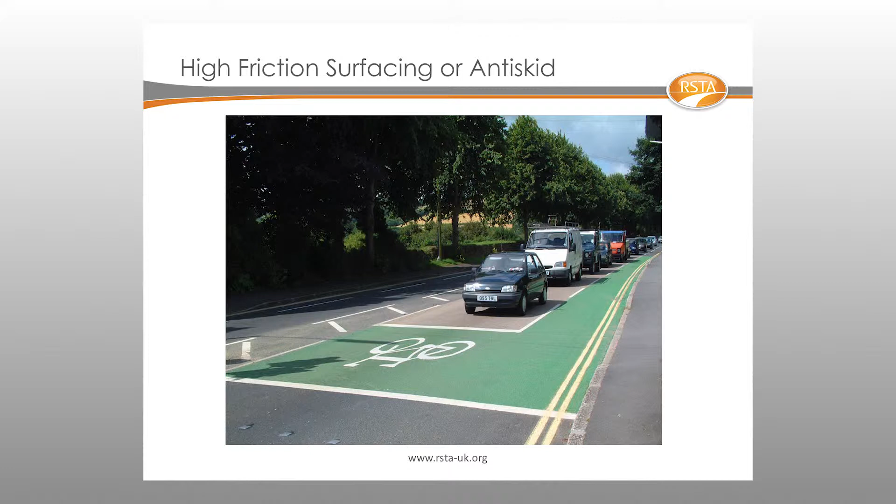So that's what we're talking about. There's different types of high friction systems in use, and the next speaker will go into those in some detail. It was developed primarily to reduce wet skid related accidents. The market grew to about 4 million square metres. Today it's less than 1 million square metres, so it's decreased quite markedly.

And I think the reduction really is tied in with the need for councils to reduce expenditure, reduce their maintenance budgets, and so on. So it's got caught up with all that need to save on costs, and the perception is it doesn't last very long, it's expensive, it's a discretionary spend, and we don't need to use it anymore. And this is really why we use it. If you're into SCRIM and measuring skid resistance, the mark of high friction is 0.5 SCRIM or above.

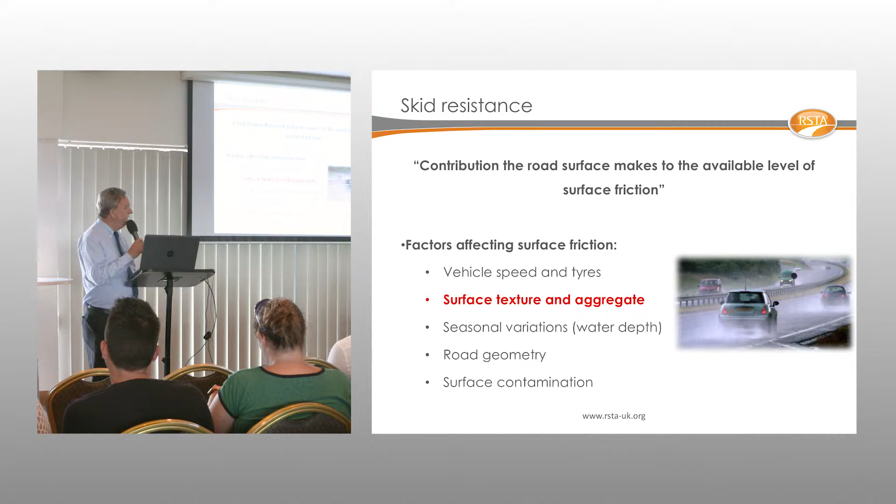Achieving skid resistance under wet conditions is quite complicated. There's a lot of parameters that are affected. You can see some on the screen there. Surface texture and the aggregate type are absolutely critical to achieving good wet skid resistance. And there's two types of texture. There's micro texture on the aggregate, and there's macro texture, which is the texture there.

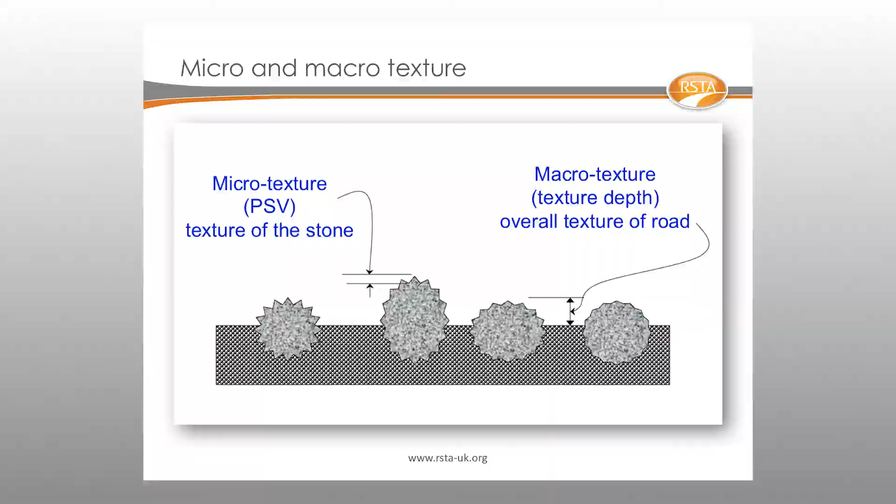The reason that anti-skid is unparalleled is largely down to the aggregate type that's used, calcined bauxite. It doesn't polish. It's got a very high PSV, very high resistance to polishing under traffic. So it retains its micro texture, which is very critical for achieving wet skid resistance, particularly at lower traffic speeds. Macro texture becomes more important as traffic speeds increase.

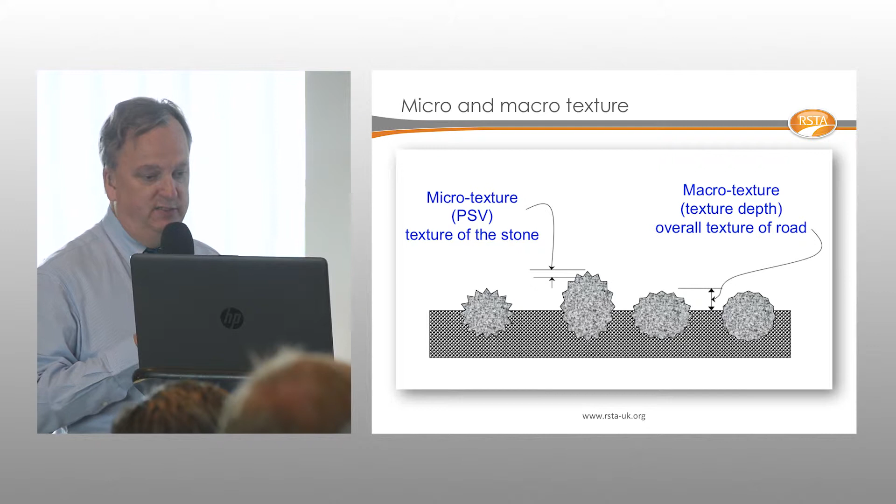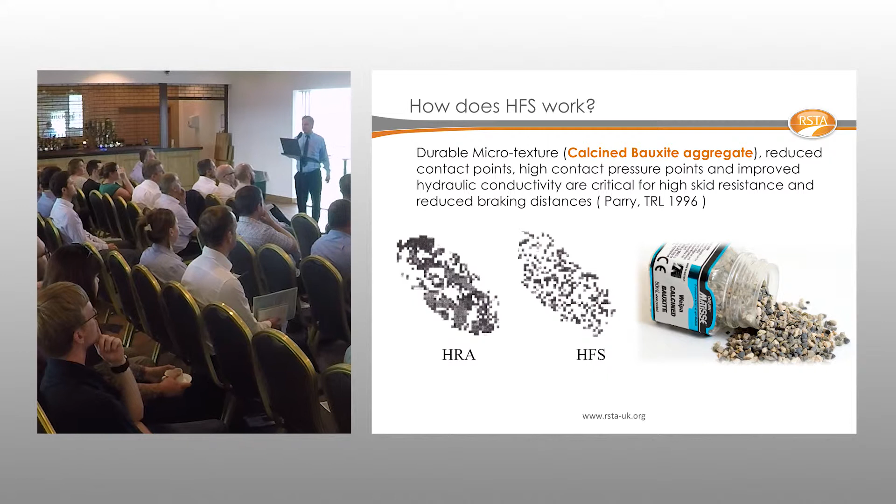We haven't got a presentation today on calcined bauxite, so I'll just say a few words about it. The aggregate comes from bauxite clay. It's quarried in places like China, Guyana and India. It's calcined in a kiln at very high temperatures, and it's an incredibly hard material, very high in alumina content. There's been some research done over the years on its use and its performance.

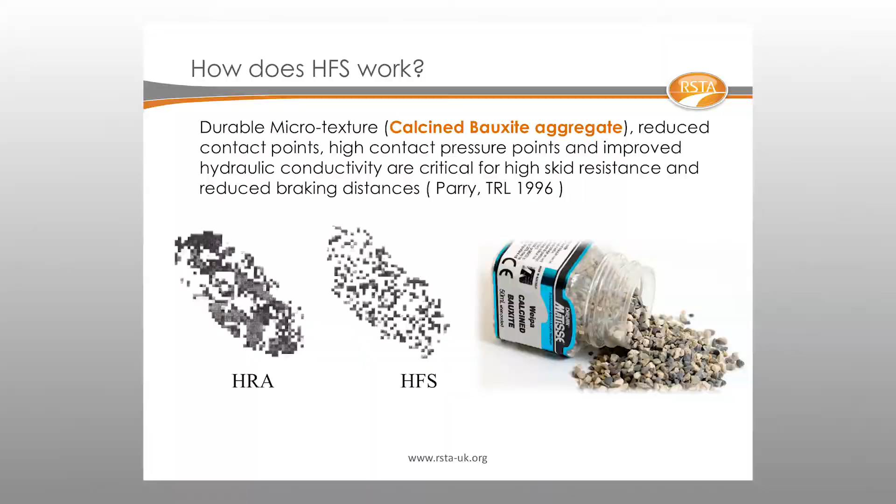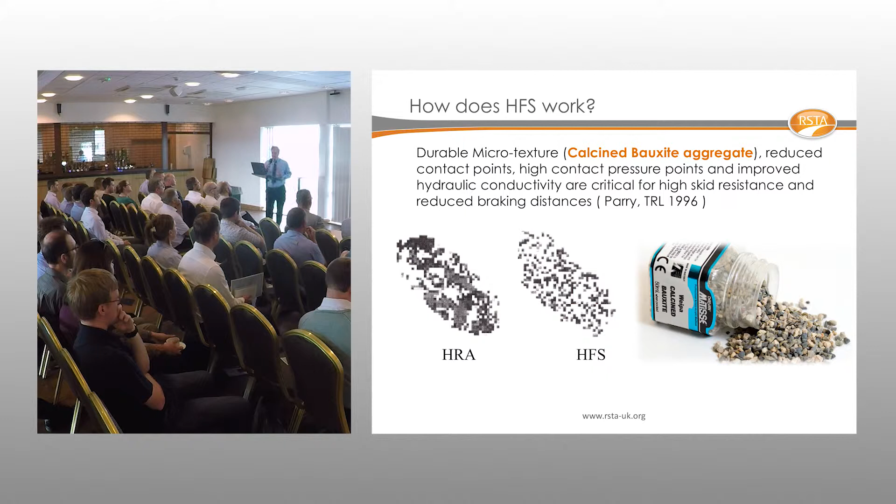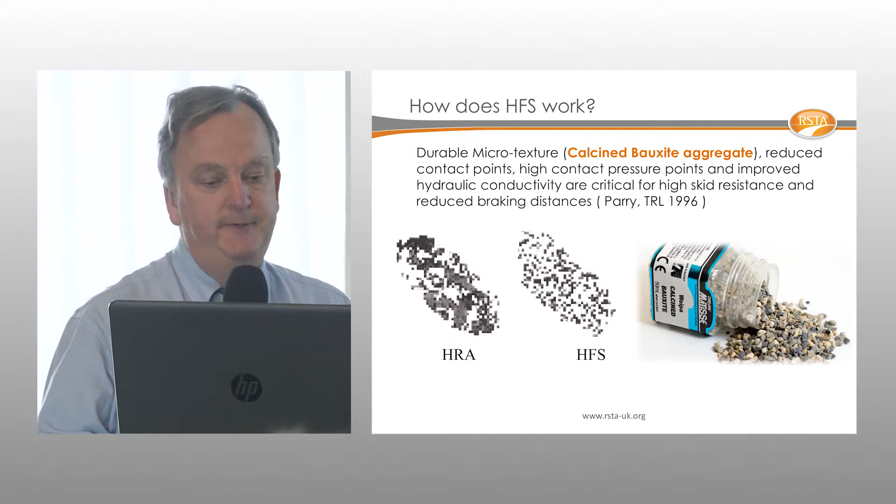You can see on the screen there are two footprints which are meant to replicate the contact between the car tyre and the road surface. You'll notice that the footprint under the car tyre travelling over a high friction surfacing looks quite different to a HRA surface. The HFS surface provides lots of high pressure contact points, like needles really, that provide very high friction. And you'll also notice that there's low density on the high friction footprint, which creates lots of channels to improve the hydraulic conductivity and help to shed the water between the car tyre and the surface.

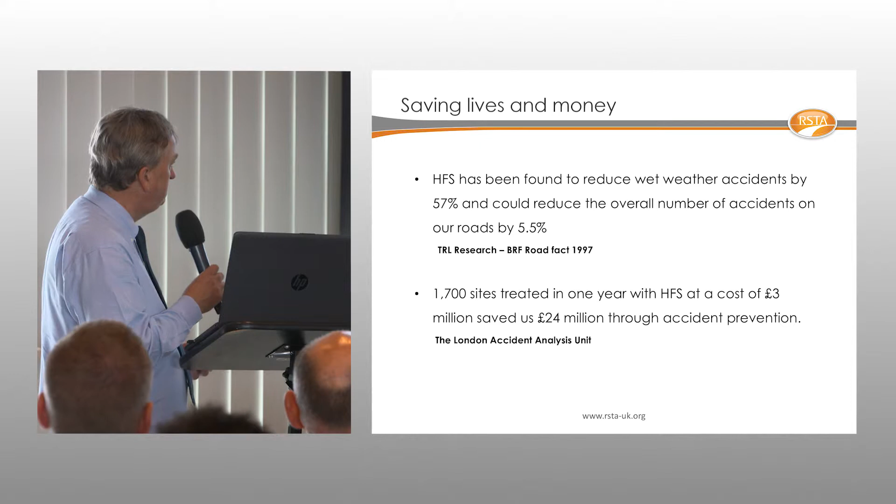We know high friction works. There's been lots of research done on its use over the years, lots of testimonials. We know it saves lives. And sometimes we need to just focus on the value it provides, not just the cost. Some work was done by RSTA a number of years ago. They looked at different schemes, different ways of improving road safety.

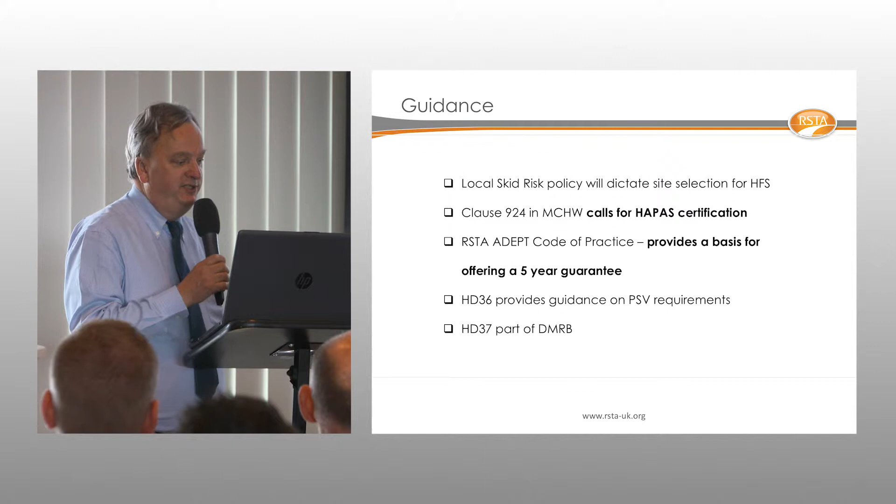And high friction surfacing is embedded in all of the specifications, in the Specification for Highway Works, in the DMRB, the Design Manual for Roads and Bridges. And I'm sure it features, or should feature, in every local authority's asset management plan and skid risk policy. You're no doubt all aware of the new code of practice coming in October, Well-Managed Highway Infrastructure. So it's a mandatory requirement now for authorities to have a skid risk policy, and we'll hear more about that later on this morning.

The specification clause is clause 924. It doesn't say very much. It just says that the system to be used should have HAPAS or equivalent certification or product assessment. There's a code of practice published by RSTA jointly with ADEPT about 5 years ago. It's been recently updated. The code of practice is important because it provides a basis for providing a 5-year guarantee. So we would encourage all authorities to think about stipulating a 5-year guarantee in contracts.

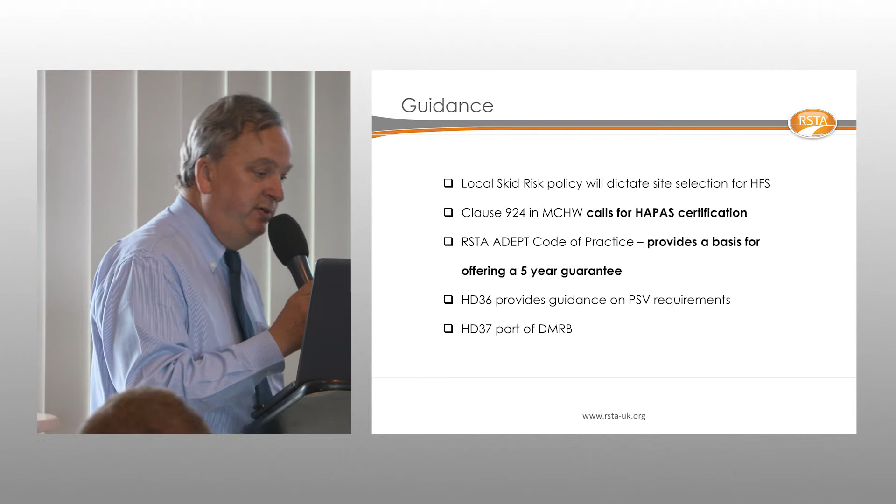HD 36 is important. That provides guidance on how to set your investigation levels and PSV requirements dependent on the site category. And HD 37 is part of the DMRB, which is being updated.

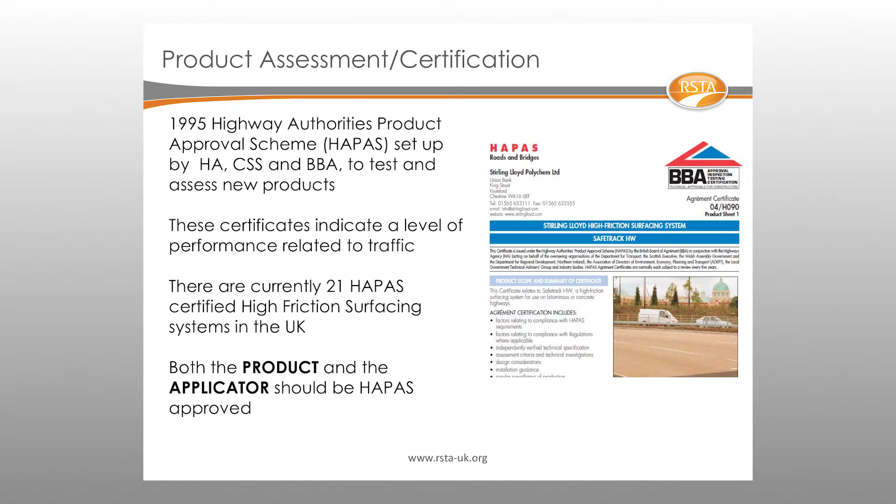There is a presentation later on today about HAPAS and the HAPAS scheme. I think the scheme for high friction surfacing was in fact the very first HAPAS scheme. I think it sprang into life about 1995. Currently there's 21 certificates in issue, which cover a wide variety of different types of high friction systems. And the important thing also is that the scheme covers both the performance of the product, but also the application of the product. So applicators also need to receive HAPAS approval.

The market's changing. The BBA dominated this particular product assessment certification scene for many, many years. We've now got a company called PTS who are providing a similar type of, or an equivalent type of product assessment certification.

So when to use it, I think basically your skid risk policy will outline where you should be using high friction surfacing, anywhere where there's a SCRIM requirement of 0.5 or above, but typically approaches to roundabouts, crossings, junctions, where you've got a bad accident history on the site.

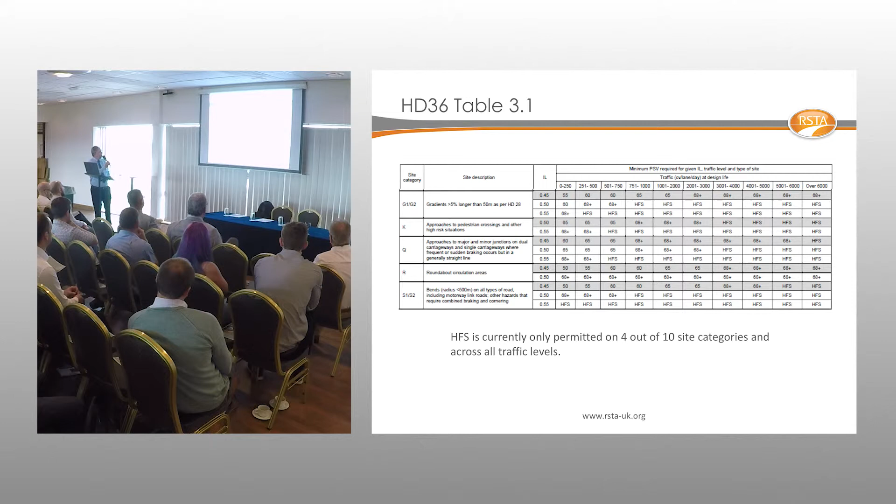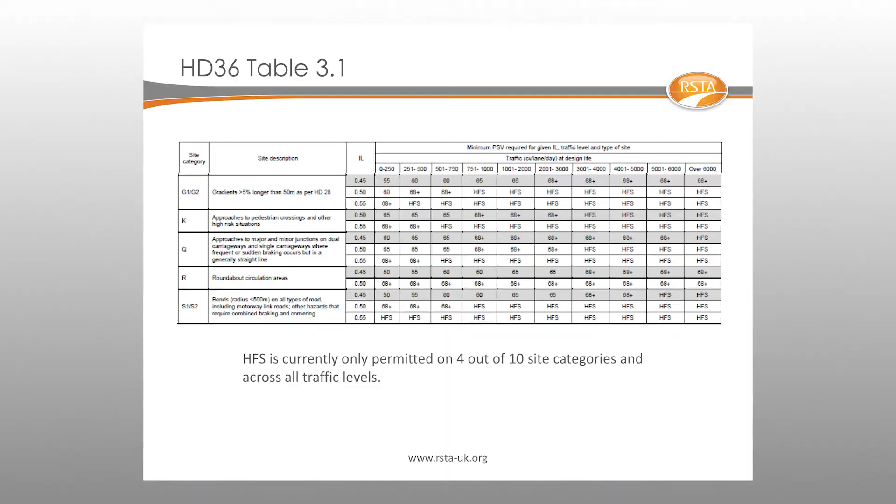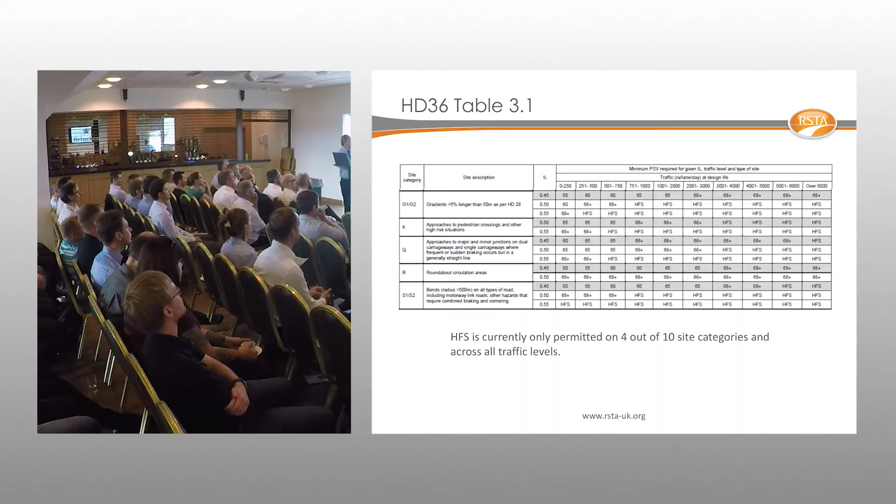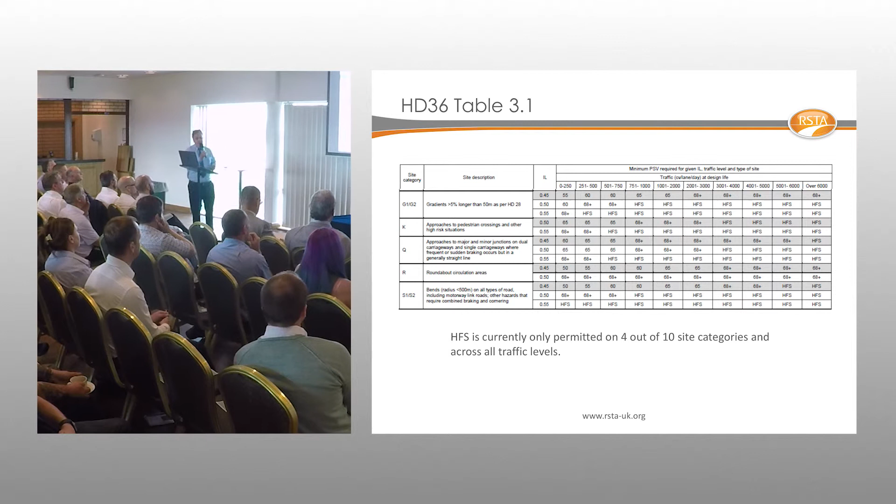I mentioned HD 36. This is table 3.1. HD 36 is now going to be called CD 236 in the new DMRB as part of their revision, but the table remains pretty much the same. The shaded rows is the default value, investigatory level driven value for PSV. And you can see there where high friction surfacing features in the table, depends on the site category. So out of the 10 site categories in HD 36, only 4 currently require high friction surfacing, and it's generally down to risk and traffic levels.

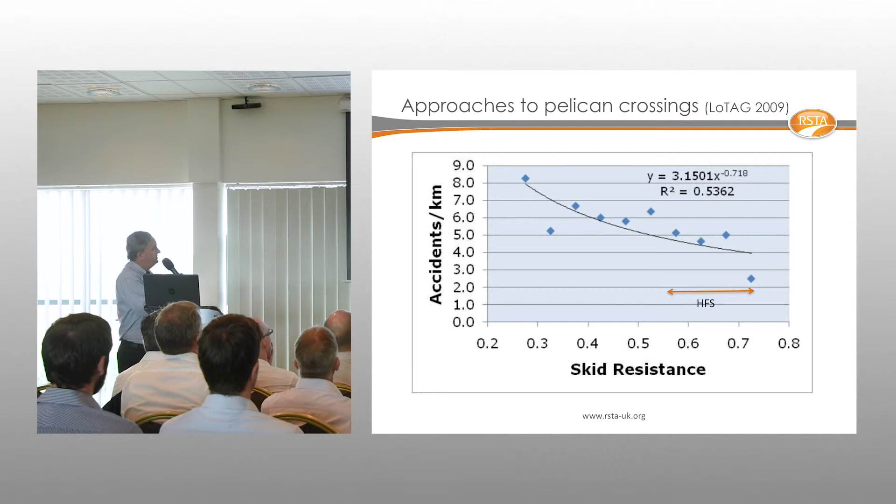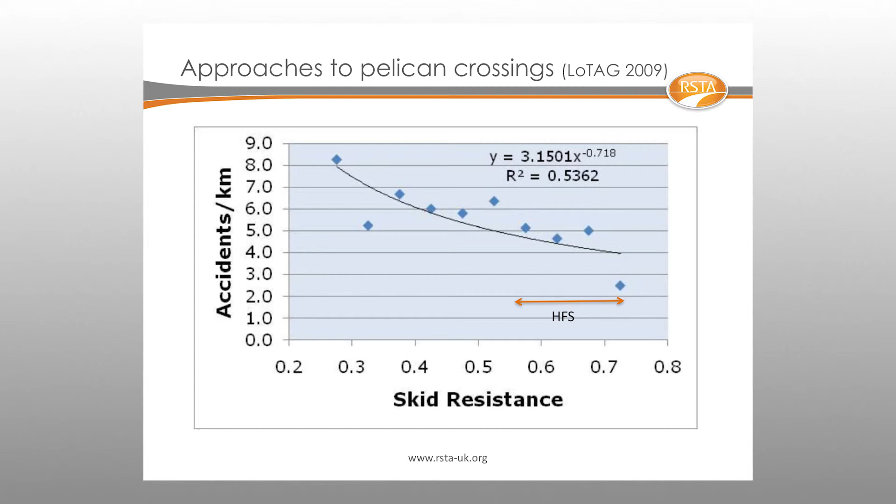Interesting piece of work done by LOTAG, the London Technical Advisors Group, back in 2009. They published this interesting little diagram which clearly shows that accidents per kilometre decrease with increasing skid resistance, perhaps not surprising. You can see there the high friction surfaces above 0.5 SCRIM.

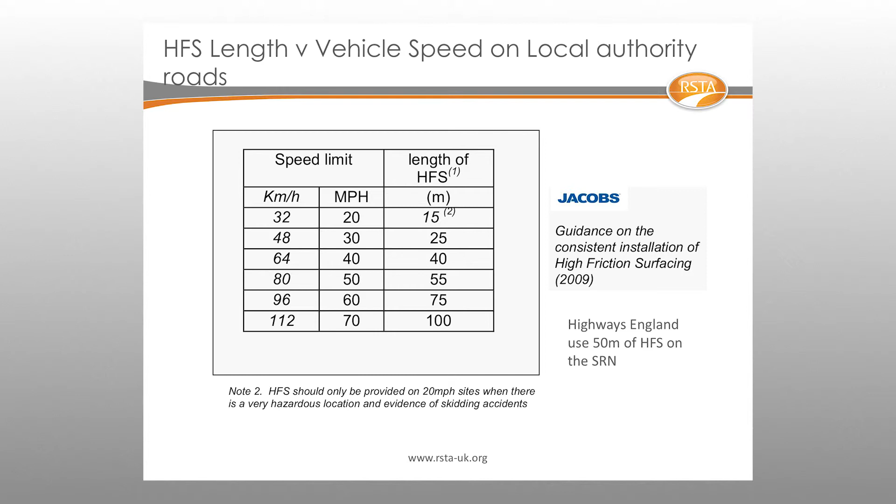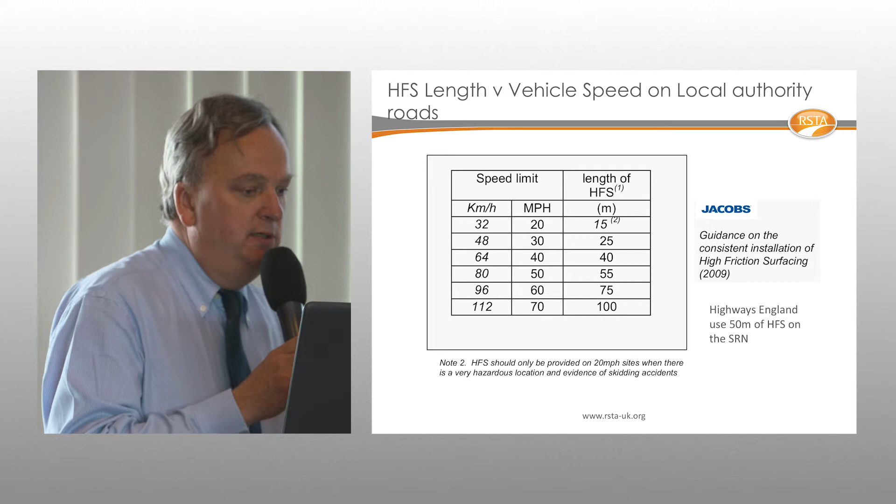We're often asked how long should the treated section be? Highways England will use 50 metres of anti-skid generally. Jacobs published this interesting table a few years ago where they're trying to relate length of high friction to the actual traffic speed. It's the only publication I can find that attempts to relate the speed limit to length of treatment.

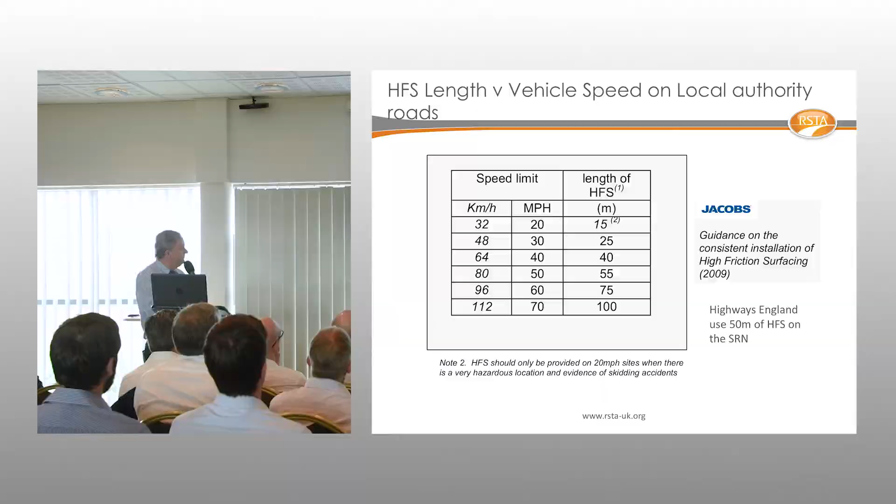And I mentioned a few minutes ago, one of the reasons why some authorities have stopped using anti-skid, or at least using far less of it, is because of this perception that you can use high PSV asphalt instead. They're very different materials. I guess the simplest way of describing it is that asphalt will polish over time, and on that basis the SCRIM will decrease. Providing that the anti-skid system remains in place, it should continue to deliver a consistent level of SCRIM over a longer period of time. And PSV doesn't equal skid resistance. It's a surrogate test really. It tries to give you some indication of what the SCRIM value might be.

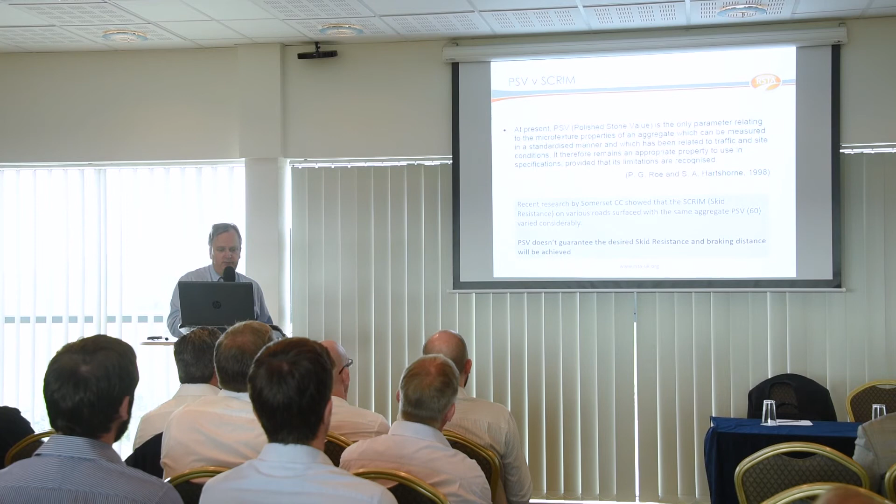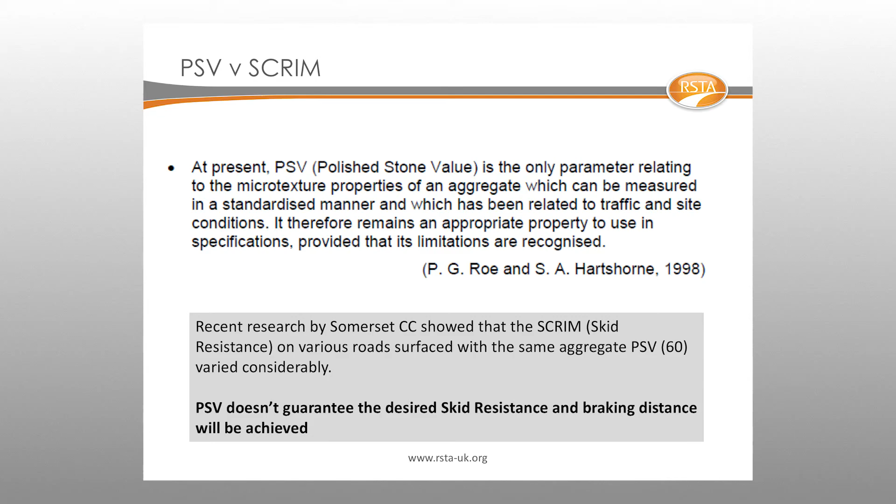Some interesting work done by Somerset a couple of years ago where they scrimmed sites that have been treated with the SMAs from 8 different quarries, all 60 PSV, and they found that the SCRIM values did vary. So we know that PSV doesn't necessarily mean skid resistance.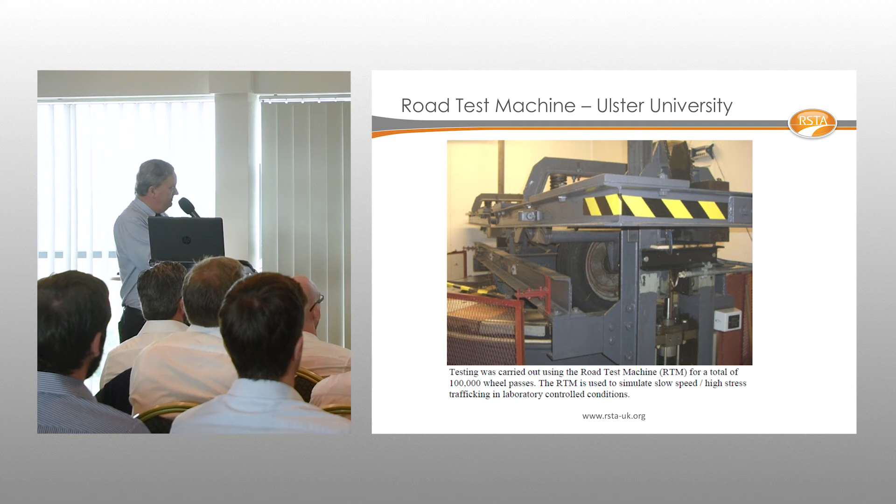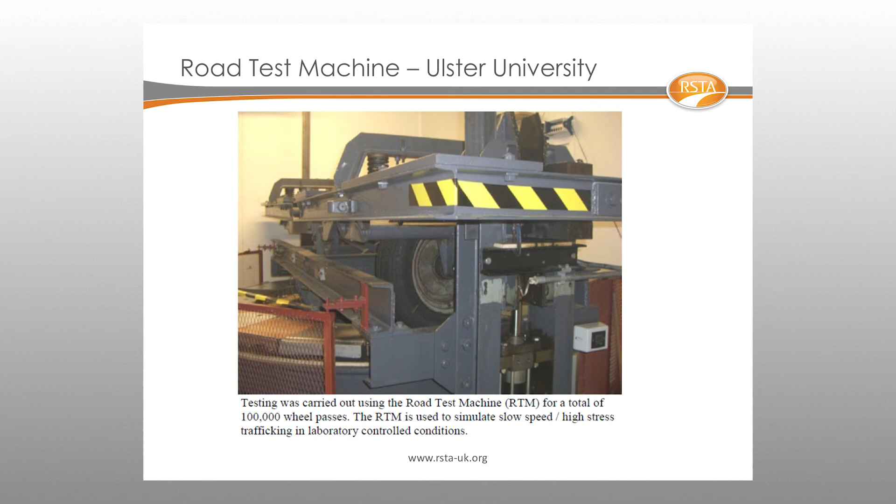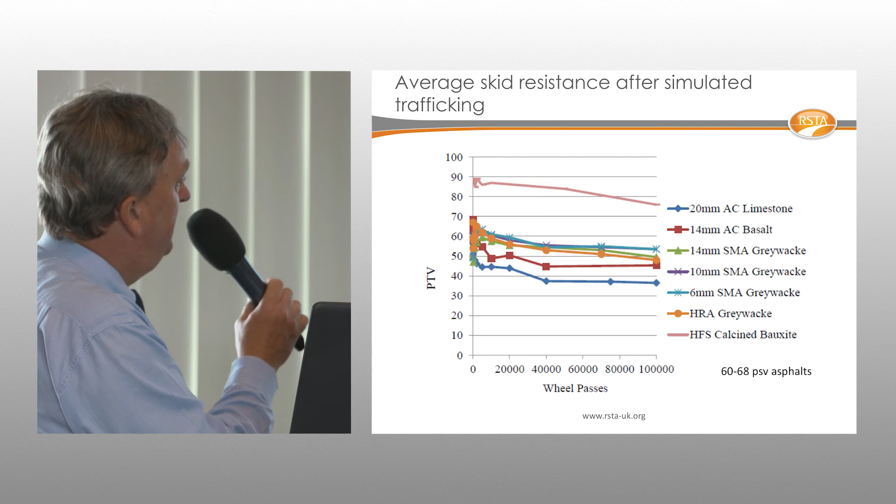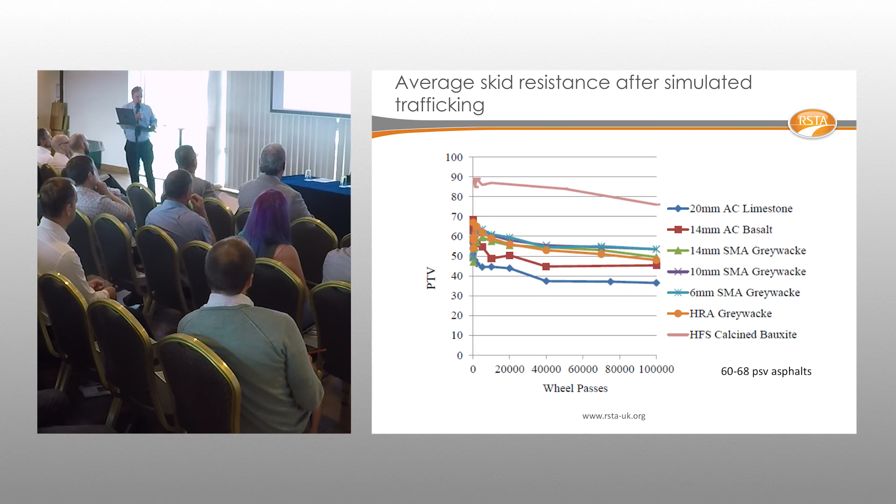And there's some interesting research done at the University of Ulster on the same theme, using their road tester, a big beast of a machine. You've got a slab there under test under the wheel, which rotates around, and the wheel goes backwards and forwards to simulate trafficking. And after trafficking for 100,000 passes, they measure the surface friction. And you can see at the top there you've got calcined bauxite. PTV I think is pendulum test value. In the middle there you've got lots of different high PSV asphalts that are demonstrating lower SCRIM value because they're polished up essentially.

If you haven't spotted it, again there's a presentation later on this afternoon by TRL on this report, PPR 789, which compares the performance of high PSV asphalts versus anti-skid. This is based not in the laboratory, but based on real live site SCRIM data. I'll not burst the bubble of TRL, but it's an interesting report, and it certainly supports some of the views you're going to hear put across today.